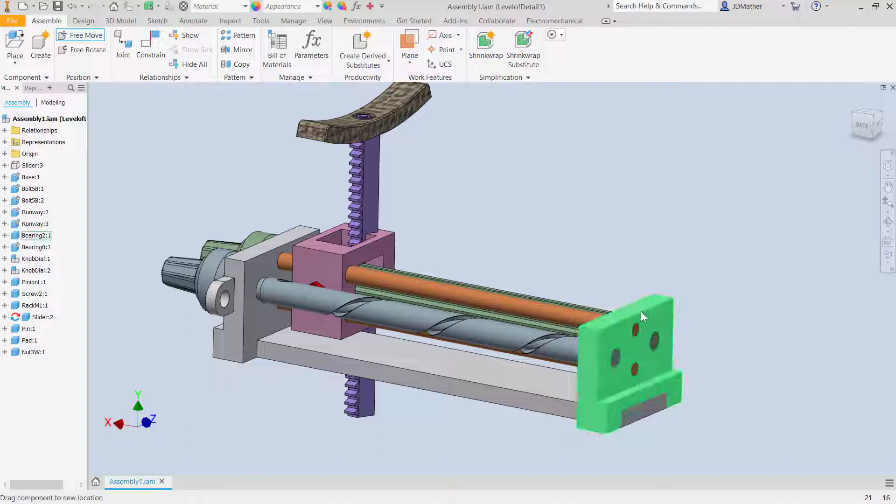Let's take a look at this assembly, and so I'm going to free move this end block out of the way over here, and then we'll take some measurements. So I'll go to the inspection tab and I'll do measure. I'm going to set my precision much higher just so that we can examine some of these dimensions. And so I'm going to measure the length of that, and I see that that is 30 millimeters. And then I'm going to measure the distance from here to here, and I see that is 30 millimeters.

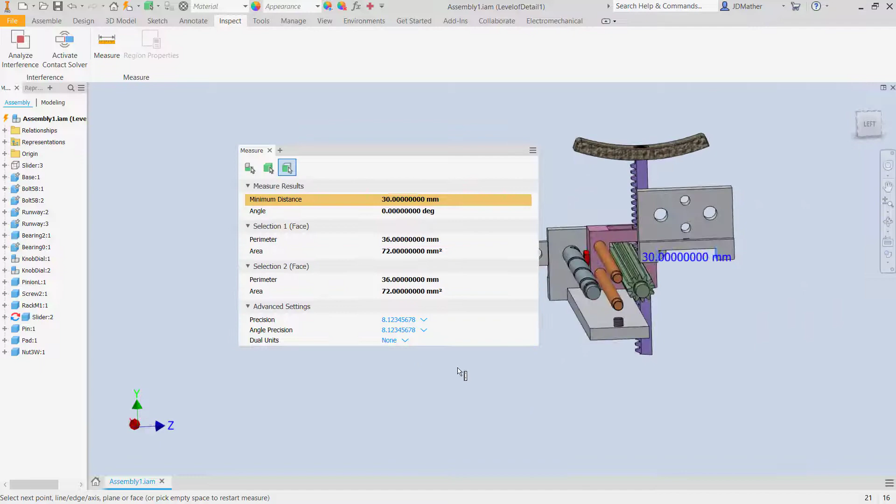When we manufacture something, we're going to have a plus or minus tolerance associated with every dimension. We can't make something that's exactly 30 millimeters. So some of these, the slots may be a little smaller than 30 millimeters, or it'll be bigger than 30 millimeters. The same way with this one.

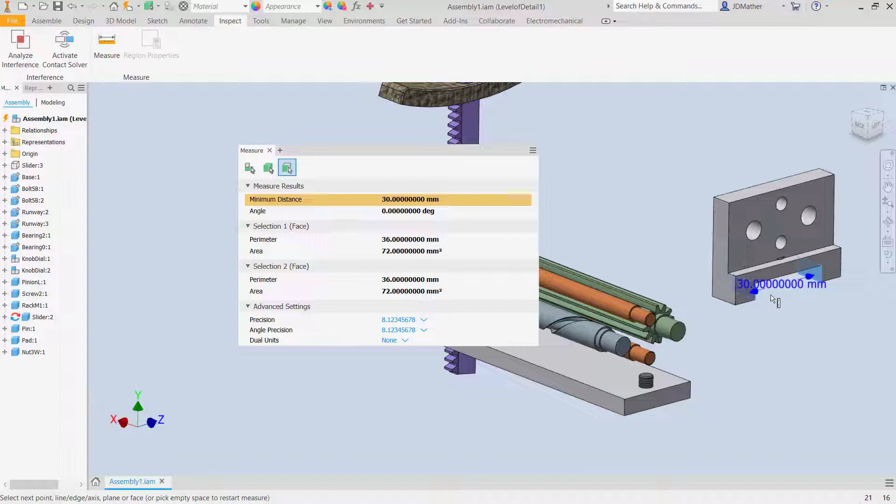We can specify a tolerance, say a plus tolerance or a minus tolerance, but in the end, let's say this was exactly 30 millimeters from there to there, 30 millimeters from there to there, these parts are not going to go together unless you use an arbor press or a big hammer to put them together. So we have to have clearance between parts. We can't have that exactly 30 millimeters on both of these parts.

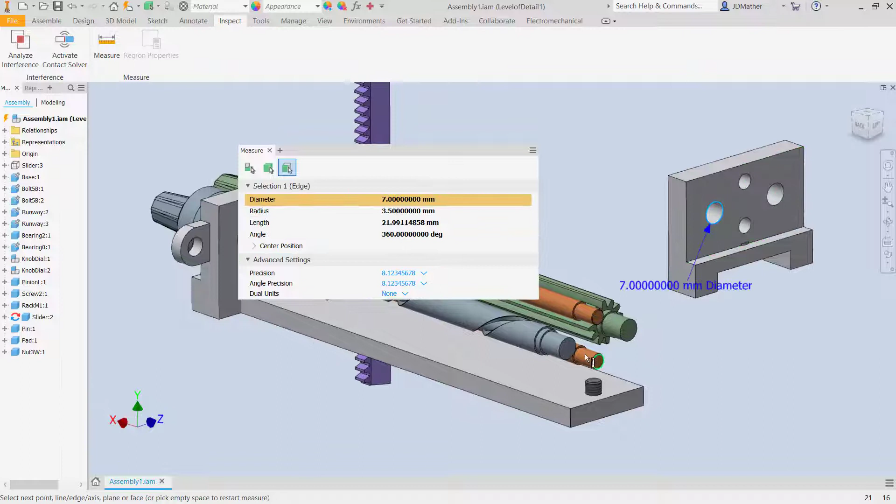And then if we're going to 3D print this, 3D printing isn't a very precise process, so we may need to add more clearance between the parts than we would even do for precision machining. And if we go around, the rest of this is all the same way, so that's 7 millimeters, this is 7 millimeters. You can't do that. That won't work. Whoops, I need to do this one separately. That's not going to work.

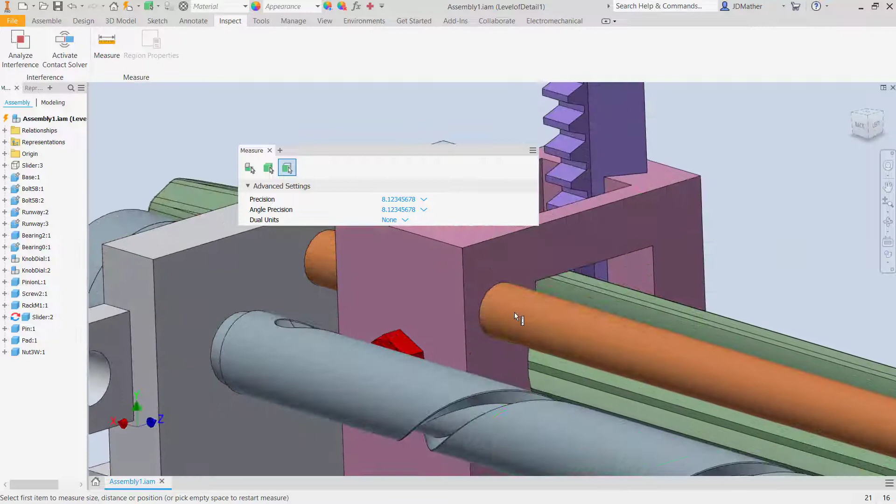If I measure, that one's 5 millimeters, this hole is 5 millimeters, none of that is going to work. So the same way down here, you have to have clearance down there, have to have clearance on these shafts up here, have to have clearance between this shaft and this part, or it's not going to slide along there. So we have to have clearances between parts. We're also missing clearance between the slot and the dovetail. It's not going to work.

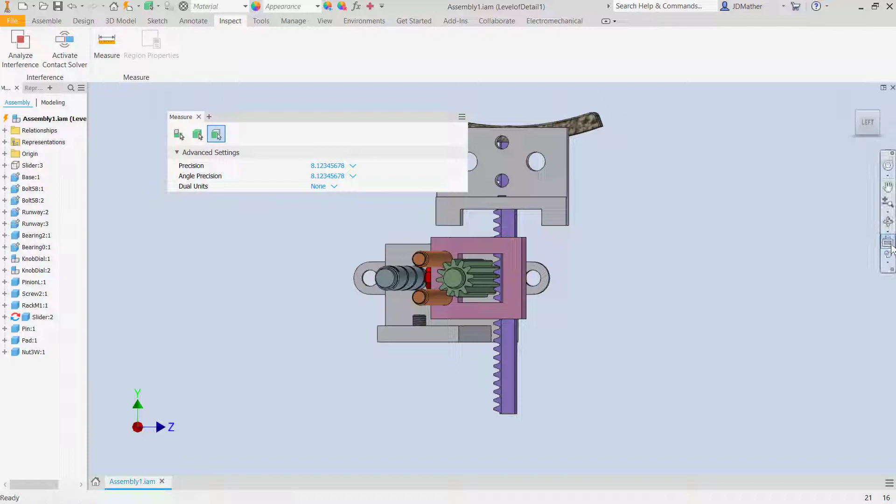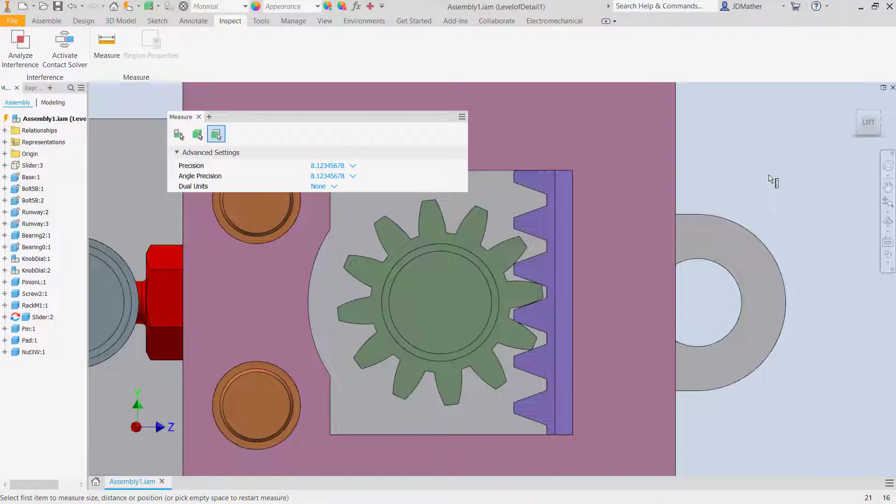And so when we make gears, we typically purchase those off the shelf from a company where that's all they do. For decades they have made gears and they know what they're doing. And so in Inventor or SolidWorks, the gears are made as cosmetic geometry, and then if you want to make true involute curve geometry, then you have some more modeling work to do to get that correct geometry.

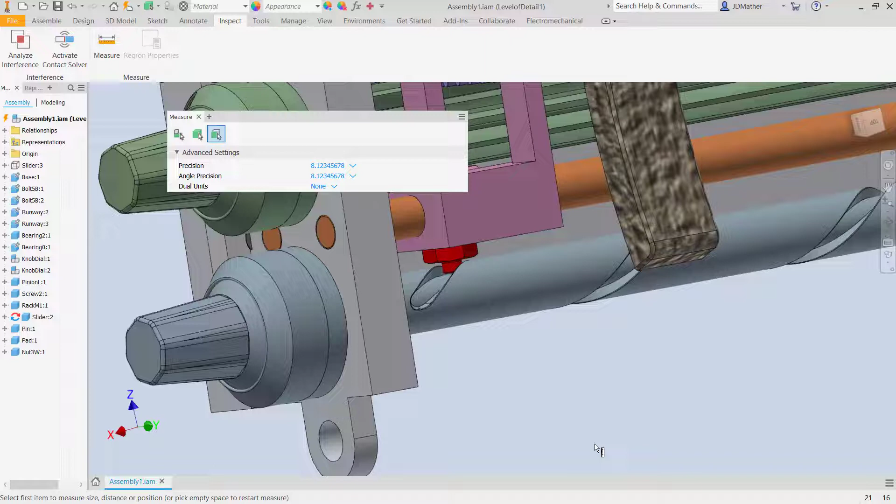And then we'll look at this pin going into this slot. Creating a slot like this is even more complex than creating the gears. Now in Inventor 2020 there is a new functionality that makes this easy to do, but in the earlier versions of Inventor it was a lot of work to create a slot like this to do it correctly.

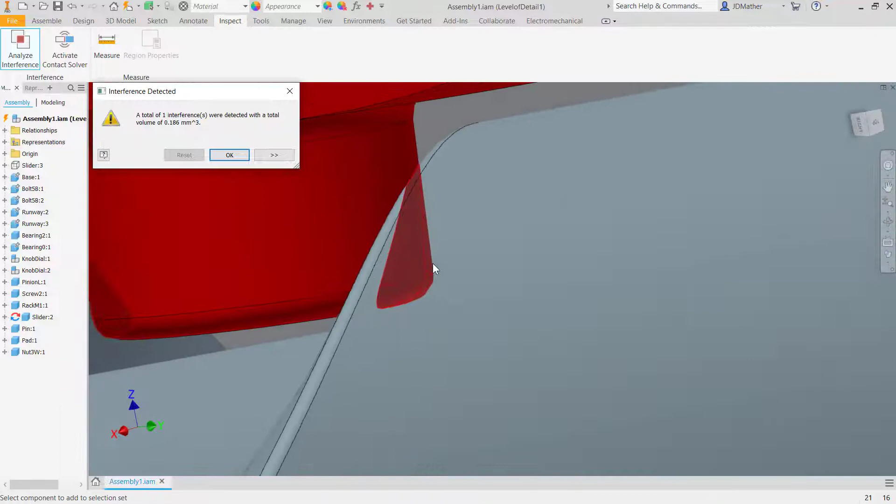Now, if we go to analyze interference and I say analyze the interference between that part and this pin, and we'll say OK to that, we see that there is some interference in here and interference over on the other side. Let's change the color of that pin so maybe it'll be easier to see. I'm going to change that pin to some other color.

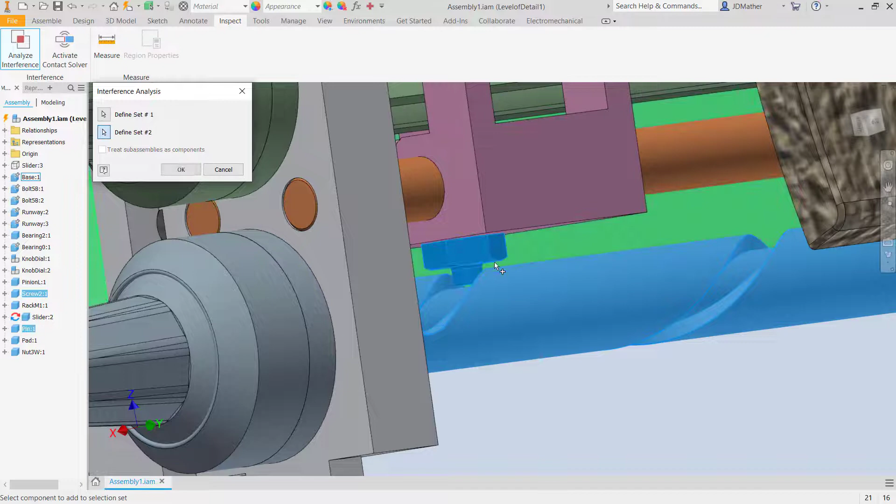Okay, and then we'll do analyze interference again. So I want the interference between this part and this part. And so those red areas are the areas of interference between those parts. This slot was modeled incorrectly.